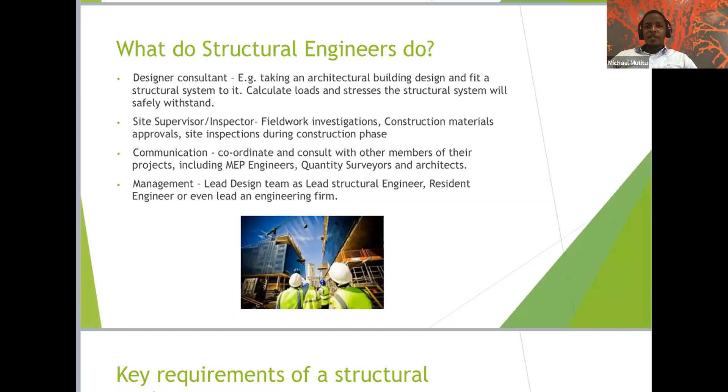So as you grow into your career, you can also get into management. You could become a lead structural engineer, a resident engineer of a big project, say something like Britam Tower, or even lead your own engineering firm.

Then the key requirements of a structural engineer - of course, that's why you went to the university. I'm sure you had some very strong mathematics and physics background to do engineering. But you also need to be creative in your problem solving skills.

And then you have to think things in 3 dimensions. You know how one item fits the other, if it's a column, how it fits the beam. You have to see that in 3D, the dimensions and all that. But that will come as you go along.

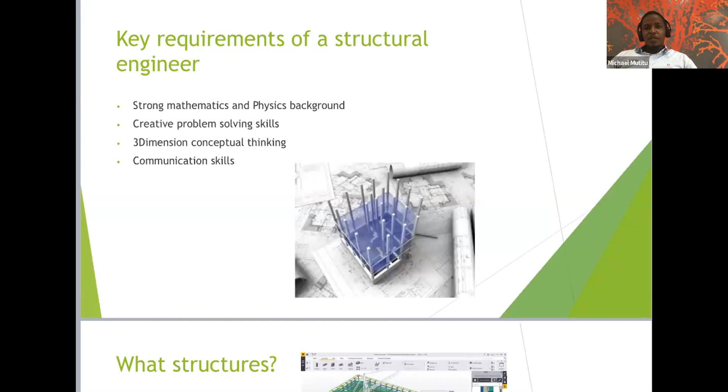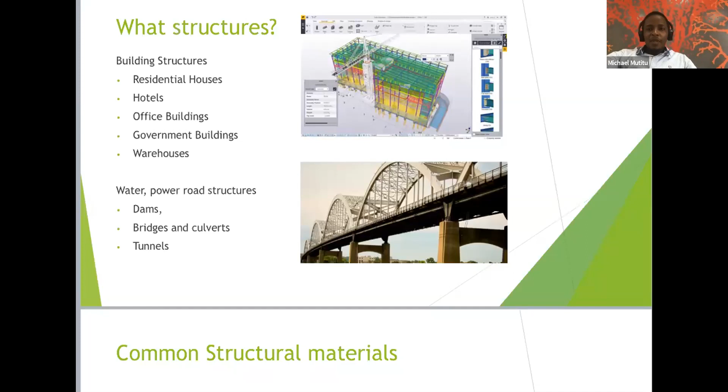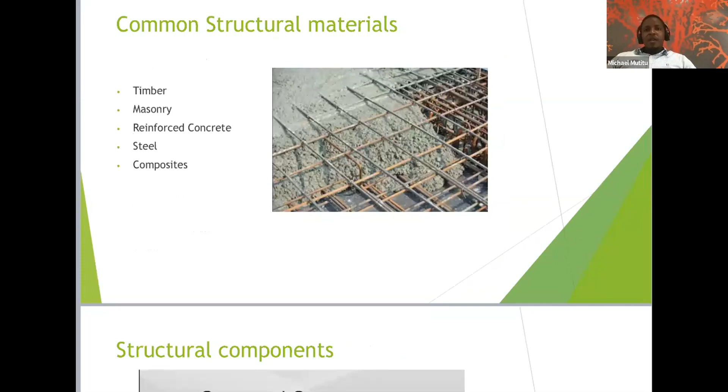And of course, again, you have to think of the materials that are structural - we have timber, masonry, reinforced concrete, steel, and composites. Composites are where now you come and combine different materials. You'd have concrete and structural steel, or even reinforced concrete can also be considered composites.

And from school, I'm sure the lecturers have taken you through structural components. The picture in front of you shows structural components. We've got beams, girders are also beams, columns, floors, foundations. So you have a section view on the left and a plan view on the right. That's how you'll be arranging your structures most of the time like that.

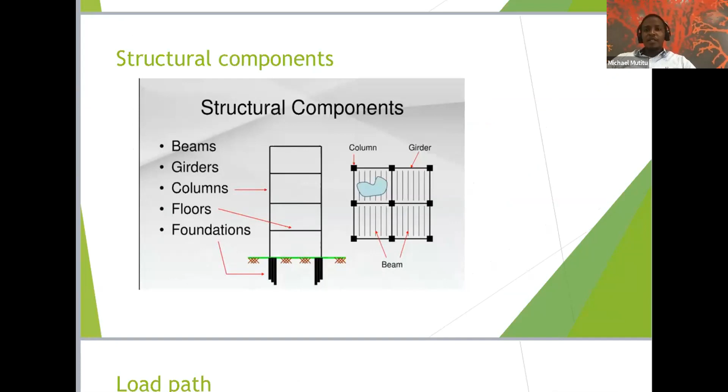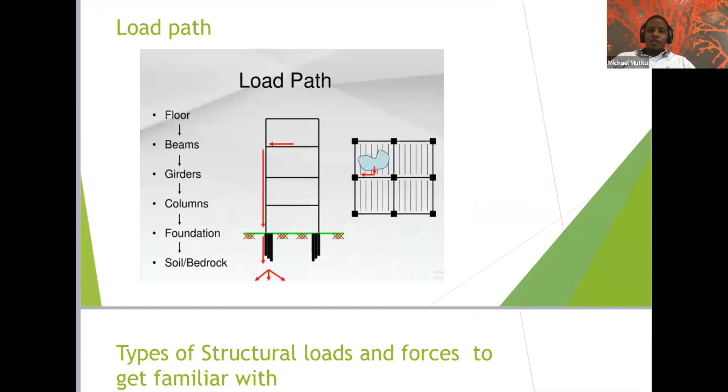Then another key thing as a structural engineer to always remember is the load path. So the load path is how the load is transmitted from top to the foundations. So when you're designing a building, you're starting from the floor all the way down, the top floors all the way down. So the load starts at the floor, goes to the beams, girders, columns, foundation, and then to the soil or bedrock.

And then, of course, as a structural engineer, you need to familiarize yourself with loads - gravity loads, these are the vertical loads, the dead and imposed loads, and then the lateral loads, wind and earthquake. Those are the forces - pulling forces, compression forces, bending forces, shear forces. These are things you'll always be dealing with. So you have to familiarize with those and make them your friend.

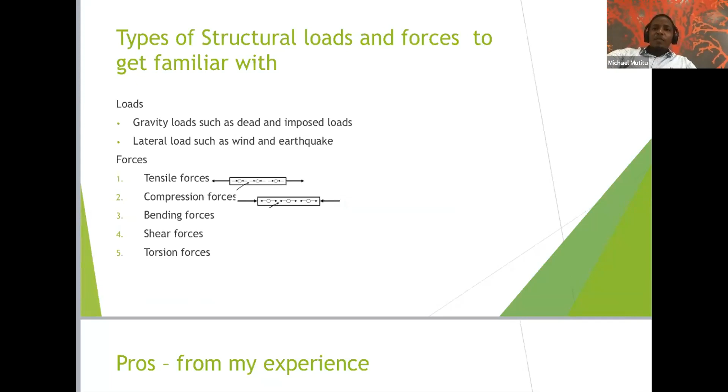I'd like to go to the pros and cons. And just before I go to the pros and cons, these are my thoughts, so I hope not to offend anyone with what I say here. And don't be scared by the cons. All you need to know is that once you start, you always get to know - with creativity, you get to know solutions, and it becomes easier with time.

And also, I'm discussing this from experience that I've gone through roads and water too. So if I could start with the first advantage I've seen for structural engineering, I think it's easy to begin with after graduation, because most small and big firms have a structural engineering department. Then number two, for those who don't like going out a lot and just love office work, most of the time is spent in the design office, combined with periodic visits. It's a bit predictable.

And then if you want to be an all-rounded civil engineer, you could start, say, with water, roads, or structures. But from my experience, having started with structures first, I found it to be easier. Then number four, jobs are easier to get, especially if you network with potential clients and other senior engineers, firms, and architects, even on your own.

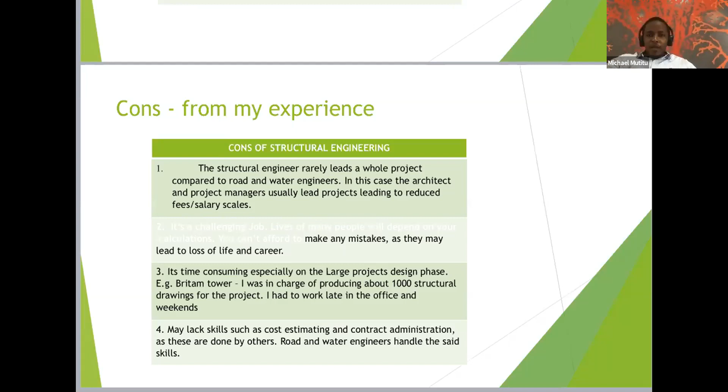Sorry, there's some white text there. I'm just gonna leave it on point number two. Again, it's a challenging job. Lives of many people will depend on your calculations. You can't afford to make any mistakes. So it might lead to loss of life and career.

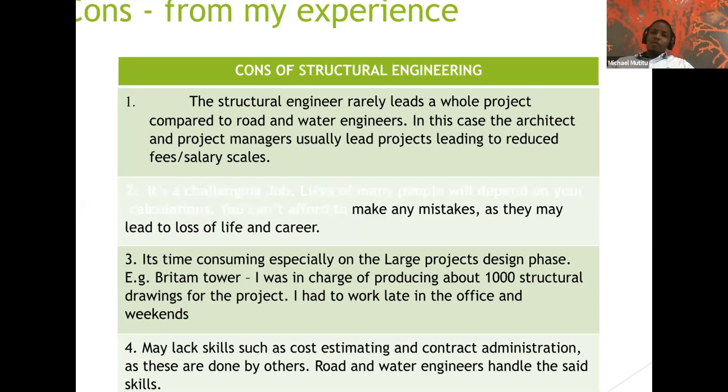So, it's not like if there's a pothole on the road and there is an accident, the road engineer will be held responsible - not as much as when a structure that falls in Kariobangi and it was designed by an engineer. So that would be a difficult situation to be in as a structural engineer. You might even be taken to court. So that's something to consider.

And number three, it's also time consuming, especially on large projects. I remember when I was working on Britam Tower, I was kept in charge of about 1,000 structural drawings, which you can imagine.

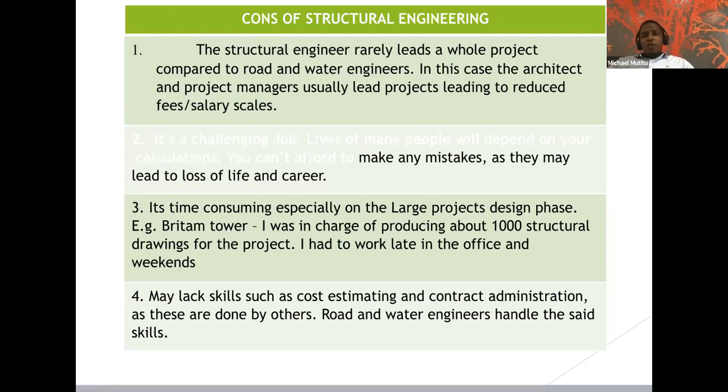So I had to work late in the office and on weekends for almost 1.5 years. That as well could be a bad thing when you're starting, but now after you get used to such challenging work, life becomes easier on other projects.

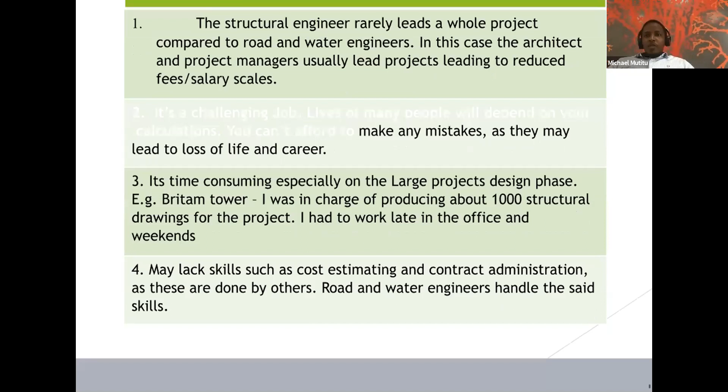And then the final point, because of time, a structural engineer may lack skills such as cost estimation and contract administration, since these are done by the project managers and architects. Road and water engineers have to handle all this. So I think that's it for me.

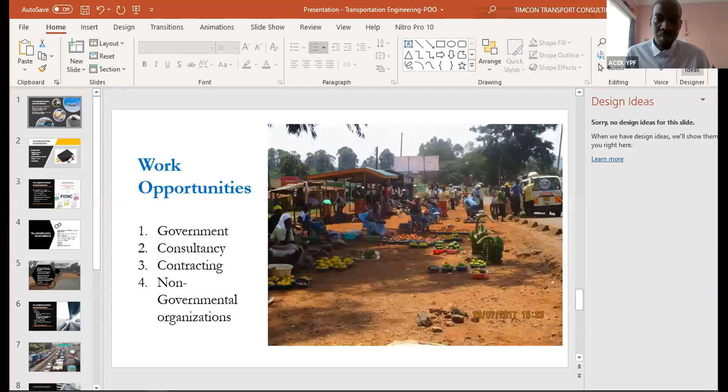Paul will go first, though kindly allow me, I will be sharing Paul's screen as he does the presentation. Okay, no problem. Can you guys see? Yes, okay. Thank you. My name is Paul Olukoye, as you've heard. I'm a professional engineer, registered with the Engineering Board of Kenya, a corporate member of the IEK, and also a member of Future Leaders.

So I'll just be taking you quickly through transportation engineering. Because of time, I'll hopefully go through it faster. Basically, transportation engineering is the application of engineering principles in the planning, design, construction, maintenance, and operation of transportation facilities. All these 5 steps are usually necessary in each and every infrastructure done by any form of engineering.

But now transportation basically looks at the movement of goods and people. It can be through the air, by sea meaning ships, on the roads with vehicles, and it can also involve rail transport and pipelines. Now with Elon Musk and NASA, you can really say that space is the new frontier when it comes to transportation. So it's very wide, it's multidisciplinary, covering a vast area in terms of transportation.

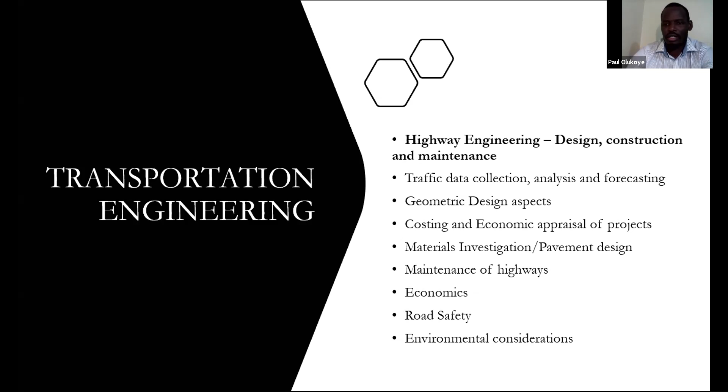So I think the economics have been covered twice. Then there's road safety, which Nancy will talk about, and also environmental considerations. Yeah, okay, next one.

There's, under still transportation engineering, there's transportation planning.

This one I won't go into detail, I'll just skip it since the slides will be provided. It's more or less the same as highways, within transportation engineering, but what it entails is more of the planning, functional design, and operations. So it doesn't touch on the hard infrastructure that will actually be made by the highway engineer. This one deals a lot with office work, looking at the planning aspects, the functional design, and also the operations of these systems.

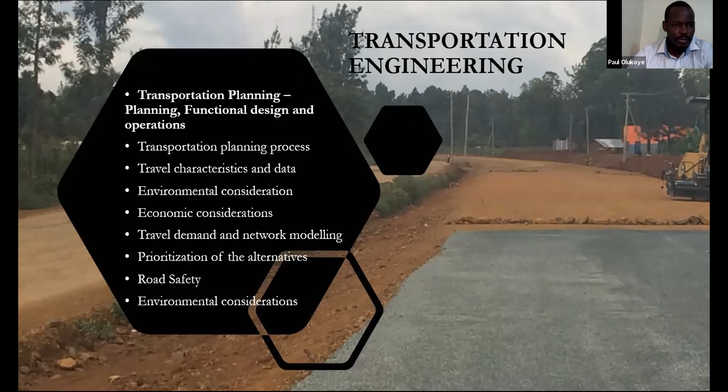Next one. So lastly, I'll look at the future of transportation engineering, what are the future aspects of this, because that's where you'll be going, and I think it's important that you know about it.

There are technologies developing that you need to be aware of. Looking at transportation analysis software, there's a lot of interest in big data. If some of you are concerned about data analytics, there's a lot of big data since some cities and countries have proper databases of inputs for transportation, including population data and road data, such as how many lanes or kilometers of road they have. Such things will be needed in the future as transportation engineering moves forward.

There's also artificial intelligence. Looking at transportation planning systems, you need to look at intelligent transport systems, which are being adopted in many urban cities around the world. This is basically coordination of traffic signal systems, and ensuring proper traffic management within these metropolises, to ensure consistent and smooth traffic flow at the optimum, so that goods and people are moving properly.

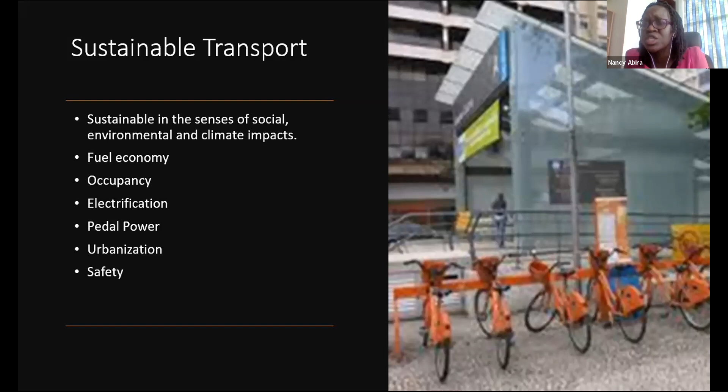Maybe Paul had explained this already, so it seems we had the same mind on this. The first thing when you want to do sustainable transport is a BSc in engineering - hopefully all of us here are civil engineers, so I may not step on someone's feet. Yes, the first thing is a BSc in civil engineering, but because sustainable transport is a new, fast-changing area, we cannot just be comfortable with having a BSc.

It is very much preferred to explore further training. Like we always say, the BSc is the most difficult phase. Beyond the BSc - the MSc and PhD - while I don't have those yet, they are way easier and put you in a better position to understand where you want to go and the kind of transportation problems you want to solve. So if you want to go into sustainable transport, I'd advise you start thinking beyond your BSc, how can you get your MSc?

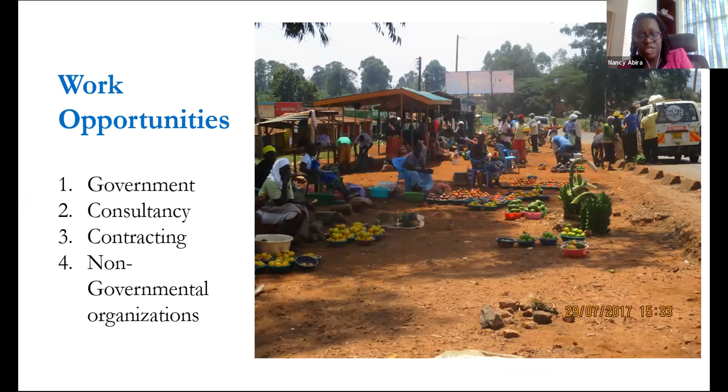Paul also talked about this. What are some of the related skill sets you'd want to have when you want to explore sustainable transport? Other than your BSc or MSc or postgrad in whatever area you want to explore, having an environmental science certification, diploma, etc. still adds onto your skill set, because when you talk of environmental factors, we still talk about sustainable transport.

Secondly is things related with sociology, anthropology, etc. For example, most of the time when I work in road safety, the first question that comes up is, what is the socio-economic cost of accidents? So you have to get out of your comfort zone of doing road safety engineering and check, when someone has an accident, how many family members have been impacted, how much is this person going to use in hospital, if they have a fracture, how much money will they use through rehabilitation?

So in this way, we tap into the sociology sense, while still being an engineer in its truest form. This skill set puts you at a higher pedestal than a sociologist who is not an engineer, because now you understand the engineering elements that come with road safety, but on top of it you also have the sociology aspect.

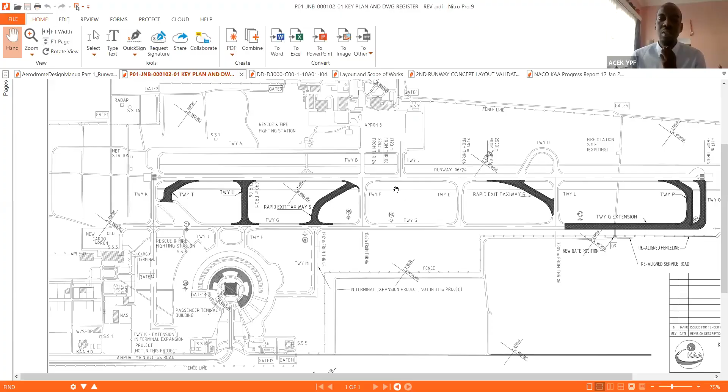So now, as you can see, there's runway 0624, and then there's the terminal building, and then there's the taxiways—Taxiway Golf, Foxtrot, Echo, Kilo. Any side other than the terminal building, where all the aircraft are, is known as the air side, and that's where you have the runways, taxiways, and aprons. On the other side of the terminal building, where the cars are and everything, where you get into the terminal building, that's known as the land side.

The factors that determine the siting, orientation, and number of runways—whether you're going to have 1, 2, or 3 runways—is also a question that has come up: why does JKIA have only 1 runway? There are many factors that contribute to needing 2 runways.

The first factor is the numbers—I don't think we currently have the numbers to require another runway, because we can easily handle the capacity we have right now. Another more important factor affecting the orientation and number of runways is the weather, particularly the runway and aerodrome usability factor as determined by wind distribution. Sometimes planes take off from one side and land from the other, and vice versa.

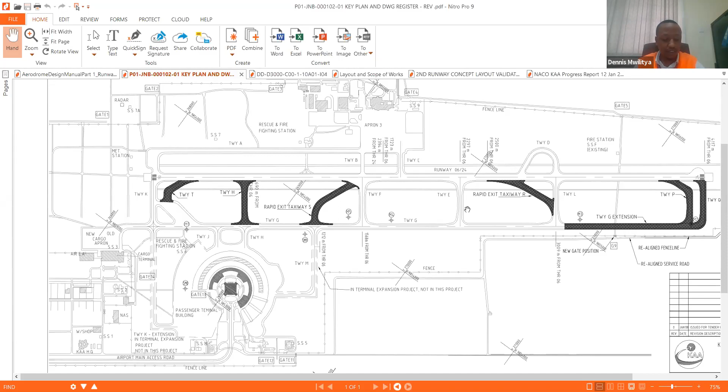Other than that, I think this is now the terminal building. On this side, you can see the aircrafts are parked, basically that's the air side, and then the terminal building - this is JKIA, a master plan for future development. Then this is the land side here, where you can see traffic lanes coming through.

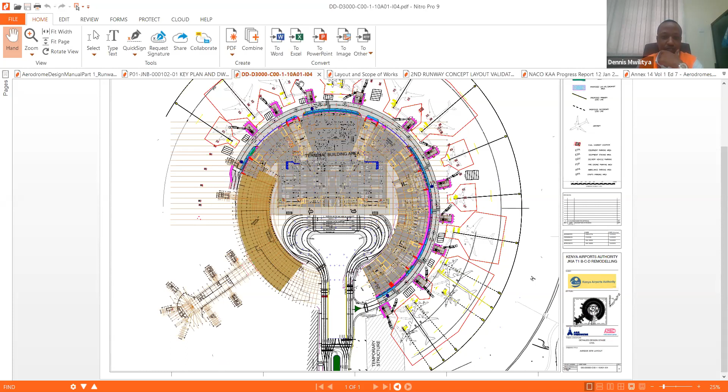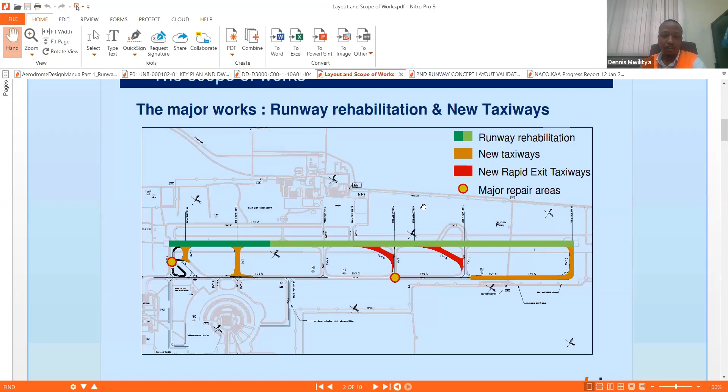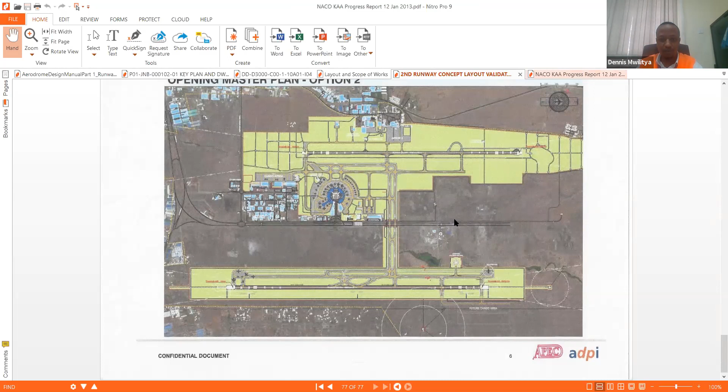And the bare land here will be used for future development by the authority. As you can see, they have major plans with their master plan. At the end of the day, this is the greenfield terminal that is supposed to be here.

It will be connected by a rail train coming through parallel to the roads. Then this is the terminal after everything, and here is the second runway. Hopefully in the future, once all this has been realized, it's going to be an amazing airport city, not just an airport.

And finally, for the positives of working in airports: first of all, it's very dynamic and interesting, because every day there's a different thing going on. Every day before you start work there has to be what we call a go-no-go meeting, basically to get advice on the weather, or if you have any VIP movement - is a president coming, is anyone coming, and so on.

The second thing, in Kenya, it's really growing right now, as not many people have covered it. So I'd advise that you could be one of the pioneers in everything that's happening. The other thing is there's a lot of traveling, basically international traveling around the world, seeing everything. And once you travel around the world, you don't only see airport engineering, but you get to experience other aspects of engineering, which you can appreciate much better.

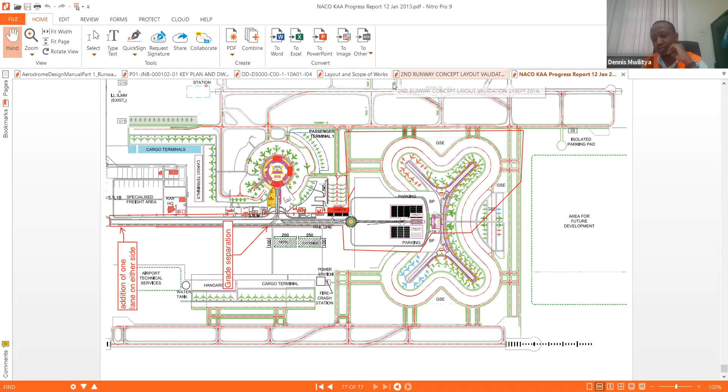Thank you very much, Engineer Mwilitya. So everyone, at least you know, if the cost of airfare is very tasking on your pocket, you know who to complain to - that guy who's just come from site. Thank you very much. And from my end, I'm seeing the chats coming in - there are a lot of people very excited about airport engineering, Engineer Dennis. So you will have to talk to some people after this, right?

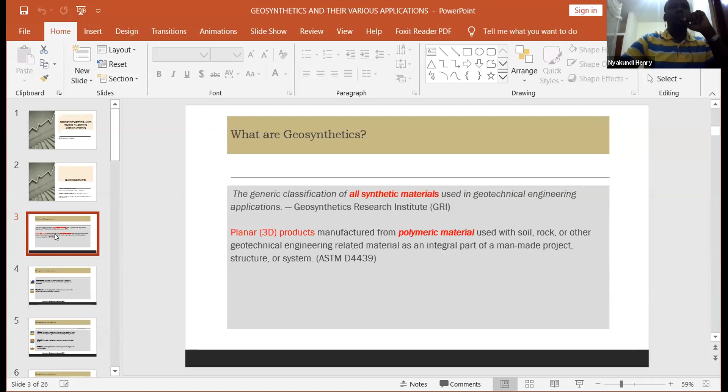Geosynthetics can be of many types and used for various applications. This area of geosynthetics is a very wide area, and these materials are very diverse. You can apply them in water engineering, roads, or geotechnical work. Depending on the field of civil engineering where you are, you'll definitely find one or two uses for geosynthetics.

We can apply geosynthetics in reinforcement, where we use the tensile properties of geosynthetic materials to resist stresses. We can also use geosynthetic materials in separation.

For example, when you're doing roads and you have a soft subgrade and then a subbase, you don't want the materials migrating into the other layer. So you put a geotextile to act as a separation layer. There are calculations to determine the strength of the geotextile with reference to the loads coming from traffic.

We can still use geosynthetic materials for filtration. Most of you know about French drains - you can use a geotextile for drainage and filtration, where you prevent material from migrating from inside an embankment to outside, letting the water flow by while the material is retained inside. This is very useful for those doing dams - in horizontal and vertical filters, you can prevent the piping of material, allowing water to pass through while the material is retained.

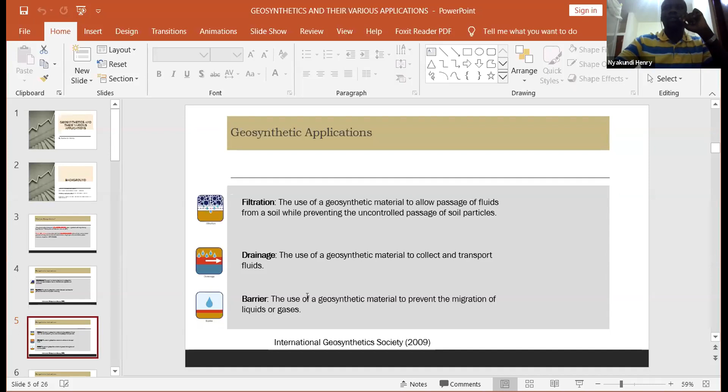We can use them as barriers. For example, at shorelines we can have huge permeable pipes where we pump a lot of sludge inside, then use that as a barrier.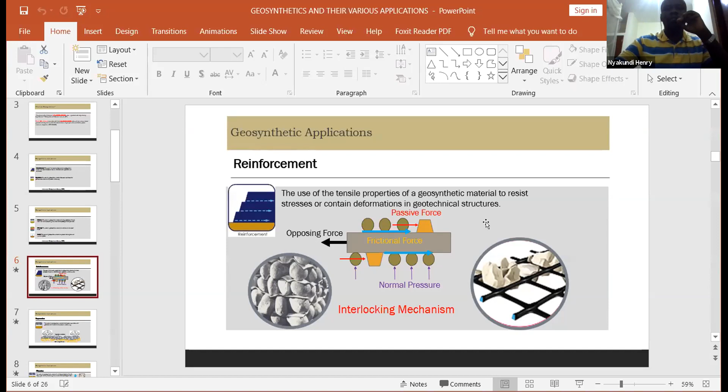Moving on to reinforcement, as I explained, there's an interaction between the soil and the geosynthetic that allows you to carry out the reinforcement. Because of time, I won't explain much, so I'll jump right into the types of geosynthetics: we have geogrids, geotextiles, geomembranes, geosynthetic clay liners, geonets, geopipes, geocells, erosion control mats, geocomposites, geofibers, and geofoam.

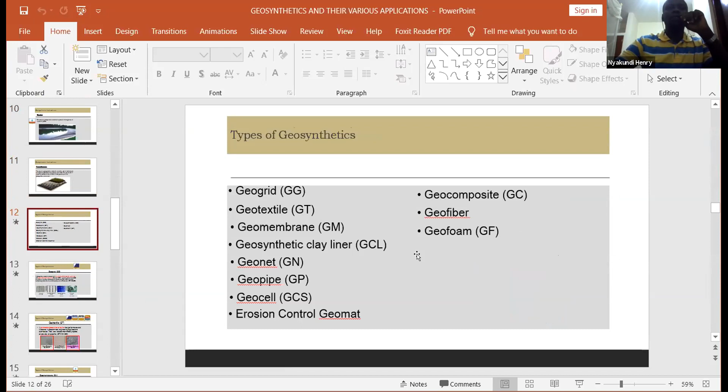Geogrids are something like you can see on your screen. These can be uniaxial, biaxial, or triaxial, depending on the strength in different directions of the geogrid. These are mainly used for reinforcement - for instance, in road pavements, you can use them to reinforce road layers such as the subbase, or to reinforce the asphalt finished layer because they have good tensile properties.

They prevent the formation of cracks, the same way you use fiberglass as an inclusion in road pavements. Also, you can use them in reinforced soil slopes.

So if you have a reinforced soil slope that is failing due to an earthquake, you have problems such as a soil which has very weak shear strength, and you're trying to improve the stability of that slope, you can use geogrid as an inclusion in that slope to improve the properties of that slope. I'll show you an example later on.

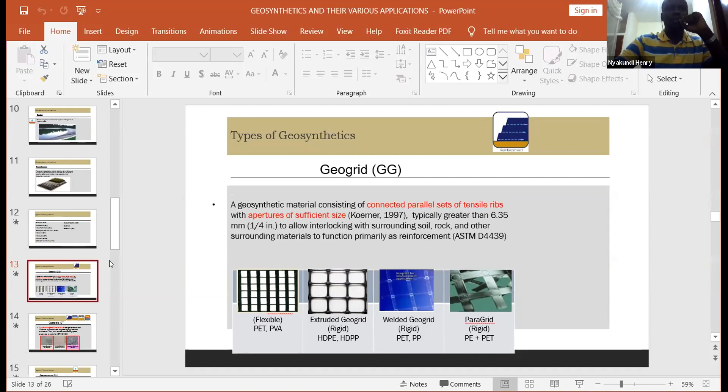So we have geotextiles. This one is mostly used for both reinforcement and separation. For example, you can use it in a geosynthetic reinforced soil bridge abutment. So instead of using a bridge abutment made of concrete, you can decide to use a geotextile, and then you construct in layers, continuously, because geotextiles resist deformations.

So they transfer the deformations over a wider area. Compared to the weight of concrete, which is very heavy, you can use geotextiles over a wider reinforced soil foundation, using them as reinforced soil foundation and abutments for bridges. Also, you can use them for embankments, road embankments.

Imagine you have a situation where you have a very small right of way, but it's very steep. So you can use these geotextiles and geogrid combination to make an embankment in such a way that you contain the soil within a short distance so that you can be able to build on top of that.

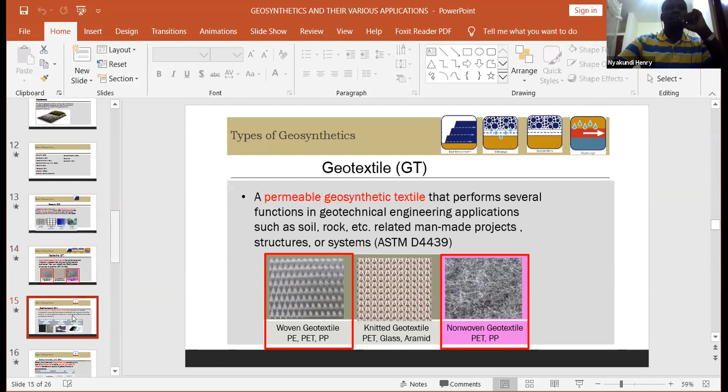Then we have geomembranes. These ones have very low hydraulic conductivity. So the main job of these ones is to prevent liquids from flowing from one point to another. For example, if you are making a pond and you don't want any water to seep away from that pond.

Or let's say you have a hazardous liquid which is dangerous to the environment, and you don't want it contaminating the immediate soil. So putting a geomembrane as the lining to your pond before putting the liquid will ensure that the liquid does not flow to the external surrounding.

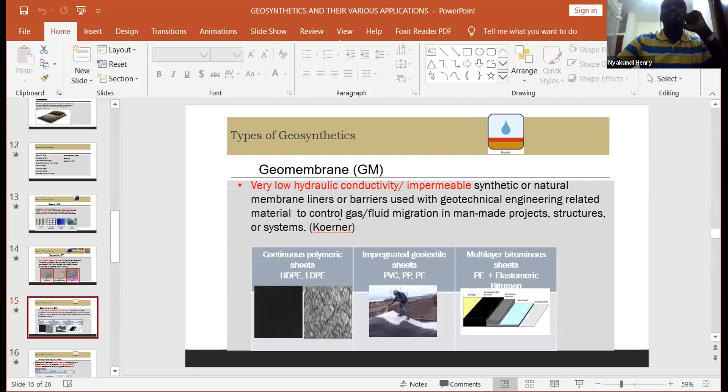Then we have the geosynthetic clay liner. This one also serves almost the same purpose as the geomembrane. The only difference is the material which is used to make it. It is made out of some type of clay, and it is hydrophilic. So when it absorbs water, it has a very low permeability, so it won't allow water to migrate from one point to another.

This one can be used in conjunction with compacted clay in landfills. Let's say you have a landfill where you want to dump your solid waste material. You can use the geosynthetic clay liner in conjunction with the compacted clay and a geomembrane, so that you can effectively contain the material and any leachate liquid which comes from the landfill, directing it to an appropriate place so that it does not contaminate the environment.

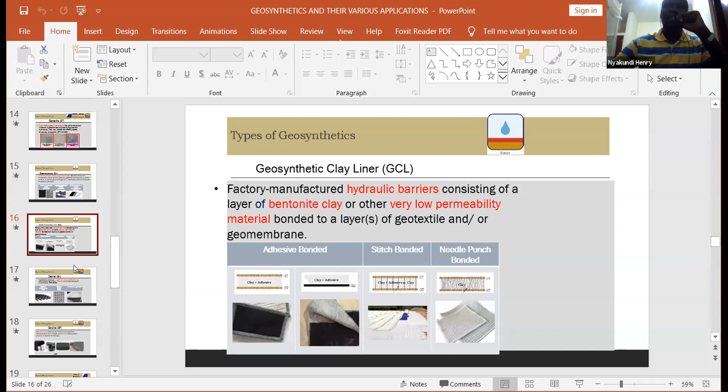As you can see, these materials are used interchangeably and together depending on how creative you are. So the problem will prompt the type of material that you're going to select to use in your design.

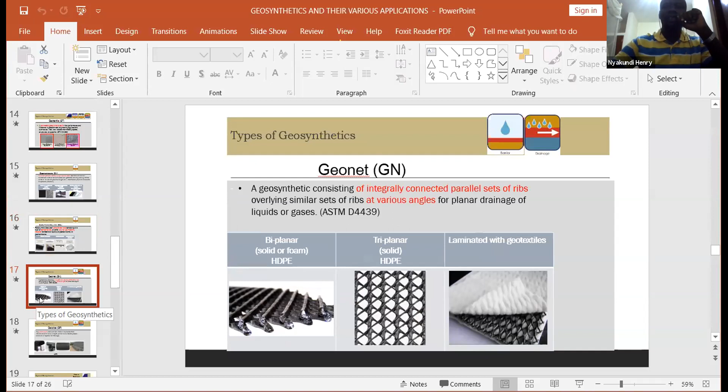So we have GeoNet. This one is used for planar drainage. Let's say you just have a slope where you want to drain water from. You can just wrap it with a geotextile, then put it in between. So when the water is flowing from top to bottom, it is intercepted by the GeoNet and it flows out. That one isn't much of a big deal.

GeoPipe is just a normal plastic pipe which you see around, maybe PVC, maybe HDPE, maybe PPR. So any variations of those pipes are geopipes because they are made from plastics. So any pipe you see around, the geopipe is something which you see often.

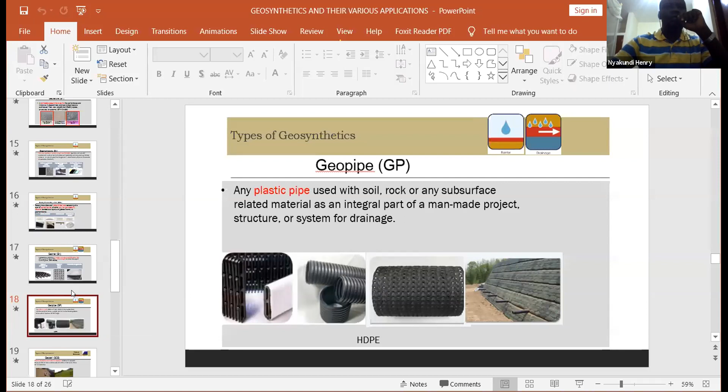So that one. Now we have the geocell. It can be used on slopes, it can also be used in roads, and it is used for containment. So when a vehicle is traveling on a road pavement, it exerts an axial load on the road pavement, which in turn deforms horizontally.

So there's a lateral deformation, and with time you find that on that road pavement, the material is chipped off away from the road sides. This geocell ensures that material is contained within its cells. I'll show you a picture later on where you will see it more clearly. It contains the soil within the cells, and because it has tensile properties, when the vehicle travels and exerts the load, it expands, then it comes back.

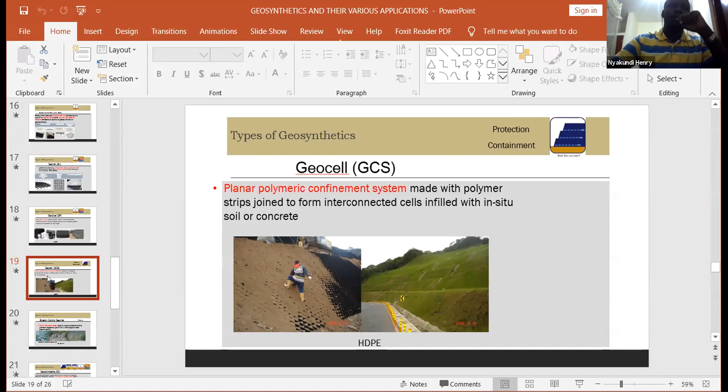We have erosion control geomat. This one is just for erosion control. Basically, you just put it on top of a slope which you have excavated. Then it ensures that vegetation grows back a bit faster. So it isn't much of a big deal.

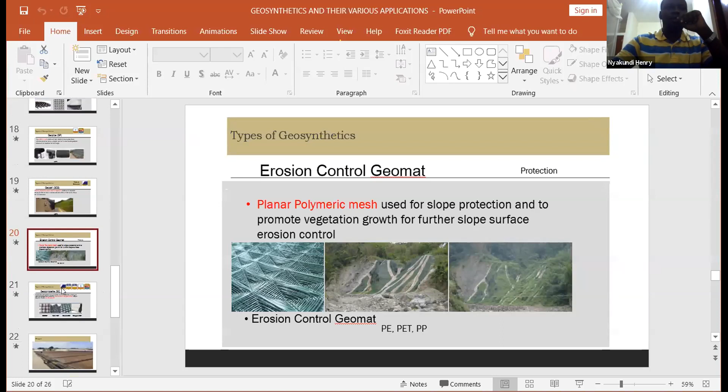Then we have a geocomposite. A geocomposite is basically any two geosynthetics which you have combined together so that you can achieve a certain objective. For example, if you want to use a geosynthetic for drainage, but you don't want soil to get into it, you put a geotextile around that drainage. So you have used two geosynthetics together to achieve a certain purpose. That is a geocomposite.

For example, you can combine a geogrid and a geotextile, or a geonet and a nonwoven geotextile, like that. You can combine a geopipe, like a normal PVC pipe or HDPE pipe, and use it to drain water from beneath, let's say, a retaining wall, but wrap it with a geotextile so that soil does not get into the pipe to hinder the drainage properties.

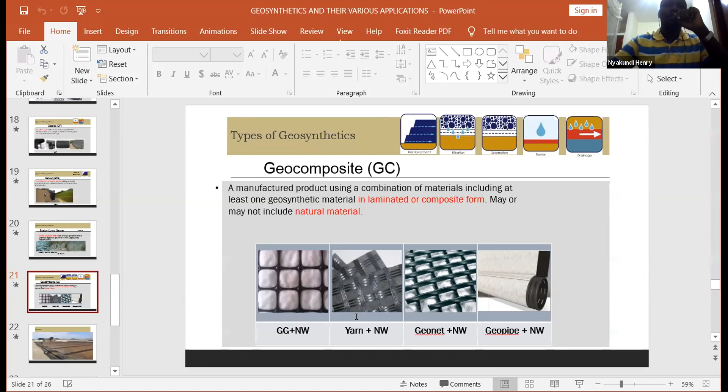For practical applications, currently what you see here is a geogrid. This one is being used as we speak. We are using it to build a parking lot, putting this geogrid in layers.

So you have to understand a lot of soil mechanics and geotechnical engineering, as Mr. Okari said. You have to understand the properties of the soil you are dealing with, then the traffic loads you want to use it for and the application. For example, here we are dealing with very huge trucks. So based on the calculations and the type of soil, we have determined the strength of the geogrid we want to use and the spacing between one layer and the next.

So this one is in a parking lot. This can also be used on roads, depending on how creative you can be.

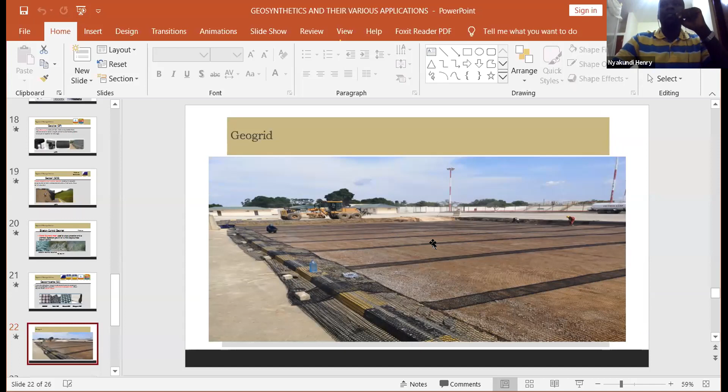Then this other one you can see here, this is a geotextile, the white one. It's a nonwoven geotextile, being used for drainage. It's like a sort of French drain. Inside here you will find aggregate, so that when you cover this with soil, water can travel laterally along this geotextile and the aggregate to the face of the slope.

The one you're seeing beneath is a geogrid. This is a reinforced soil project. We are trying to protect a slope which is prone to sliding. There's surface erosion here.

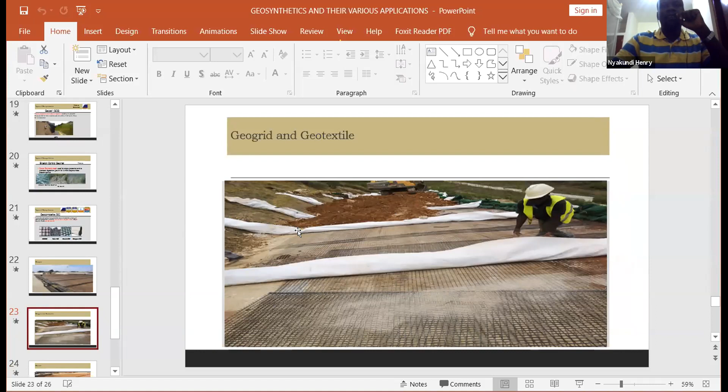This one here you're seeing is a geocell. You can see we have apertures, several apertures on this geocell. This is where you put the fill, inside these apertures. For example, this one, the depth of the geocell is about 200 millimeters.

So when you put the material here, you join these geocells together. They come as small units, so you join them together, put the material inside these geocells, and then compact as usual. So when a load is applied on top, this geocell is very flexible, as you can see. If you look at it, it will expand, and then when the load goes away, it will come back to its original shape.

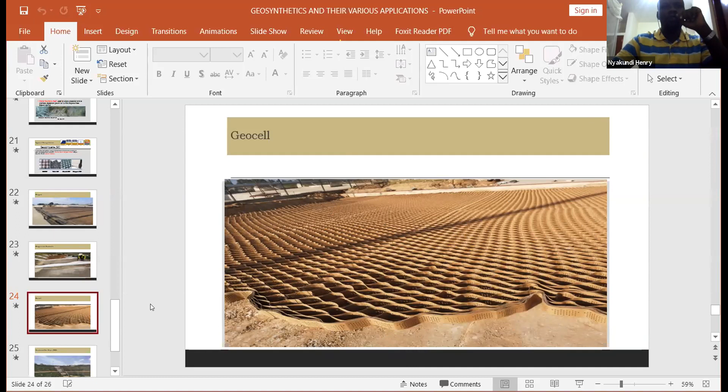These materials, I would like to say that this area is very wide. It's not like the applications are limited - it just depends on your imagination. Depending on the field of engineering where you are, foundation engineering, roadway, water engineering, structural - when you find a problem and know there is a material you can use as a substitute, you can effectively use geosynthetics in your day-to-day designs. I think that's it.

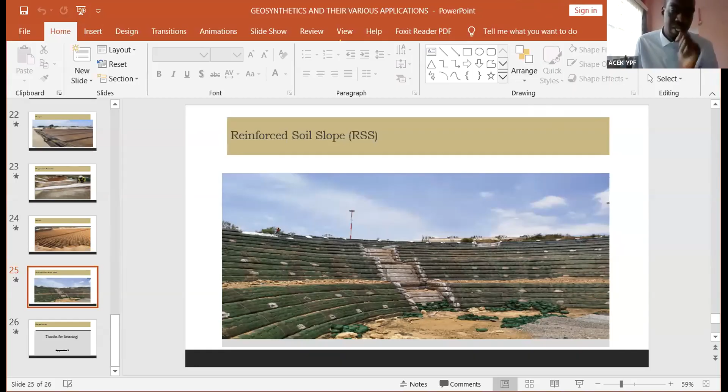Mali, can you hear me? Hi, hi. It's not a gentleman, it's a lady. I'm so sorry, you're forgiven. Oh, I am so sorry. But I am sure whatever you will say, it will impact us. Okay, I hope so. I really hope so.

Yeah, okay, so I think I'll start with my name. I hope everyone can see me and hear me clearly. My name is Mali Musilu. I am a civil engineer, and since my graduation back in 2014, I have been in the water and sewerage department of our company. Actually, Kiunga is my colleague on site currently, so we are just from site together. Yeah, so I just want to say a few things about water and sanitation, because it's a field that I've been interested in ever since I was in school. And I will start with water supply and distribution.

So essentially, what we do in water and sanitation is supply water to customers, and then now get that water back in the other part of sewerage, which one lecturer of ours used to call shit engineering. So yes, I'll start with the water side because it's more likable and less off-putting.